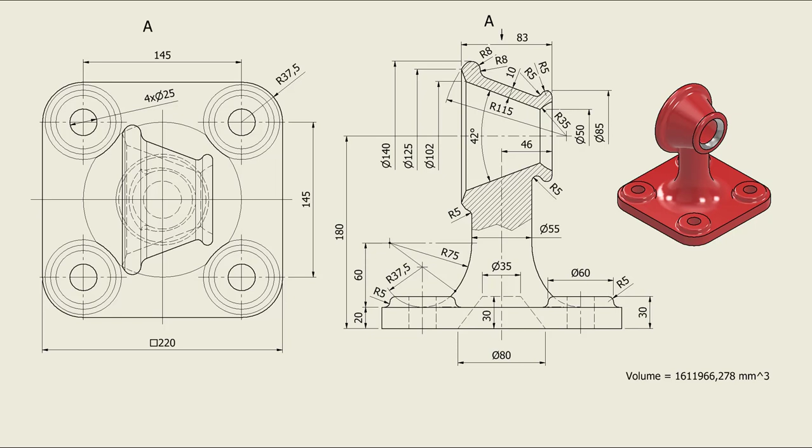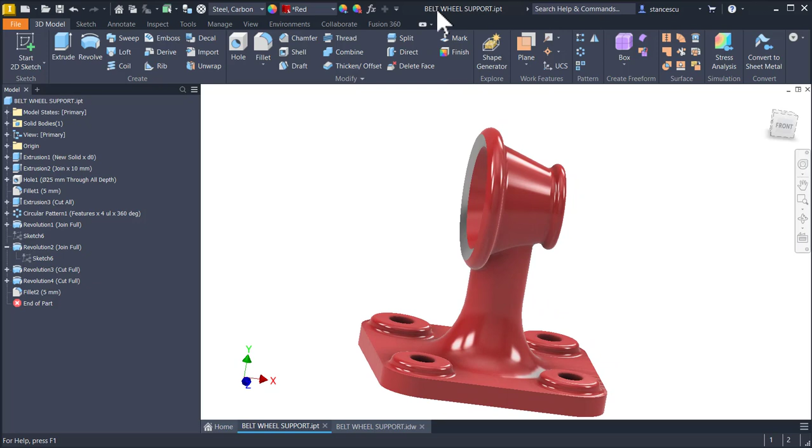Hi my friends, today we model this part with its features, faces, surfaces with the name belt wheel support.

The drawing is here, not very special. I forgot to place a center here because this is symmetrical. As you can see, with dimensions, we'll use them during the modeling.

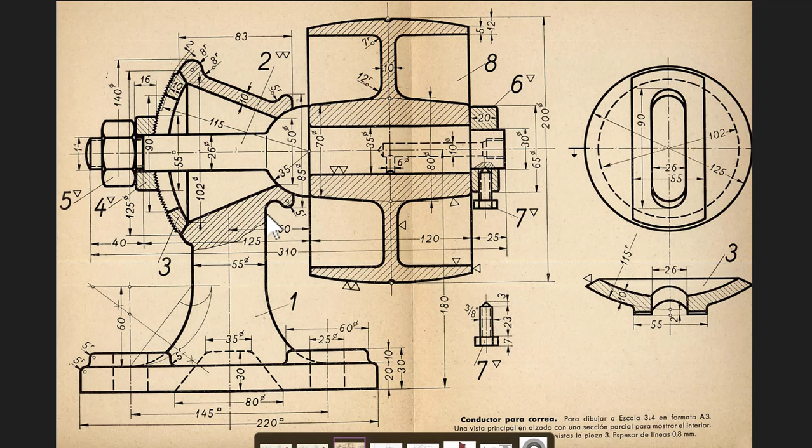The source is this, coming from Timoteo Carrera Soto. I changed some dimensions and we respect as we can this number one model as well. This part is taken from Timoteo Carrera Soto drawings, and you can download it by watching the tutorial number 182, as you can see here.

We start by creating this base plate with dimensions square 220, 145, holes of 25, radius of half of 75, and 20, 30, diameter of 60, radius 5, radius 5.

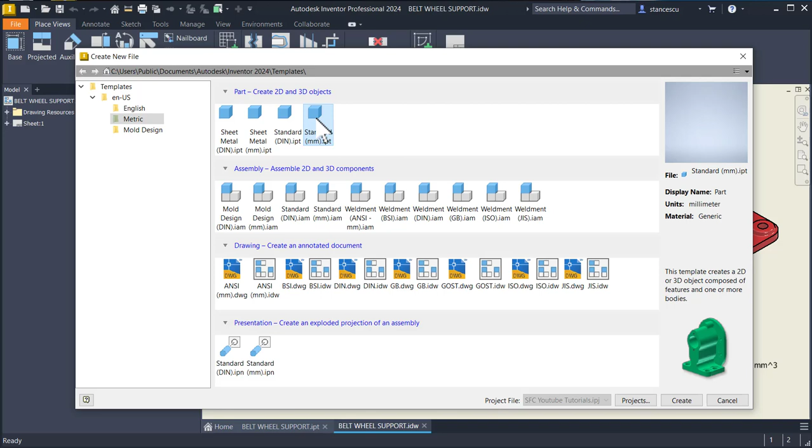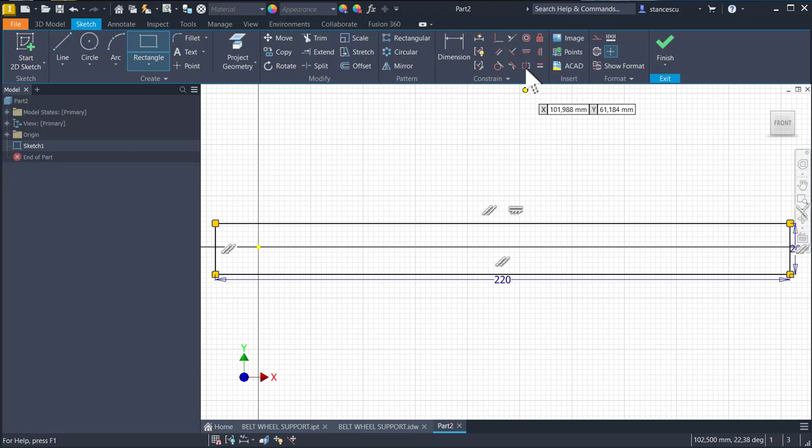New standard millimeters IPT, sketch XY plane, and we draw a rectangle with dimensions 220, tab 20. It must be placed with its center to the center point. Finish sketch.

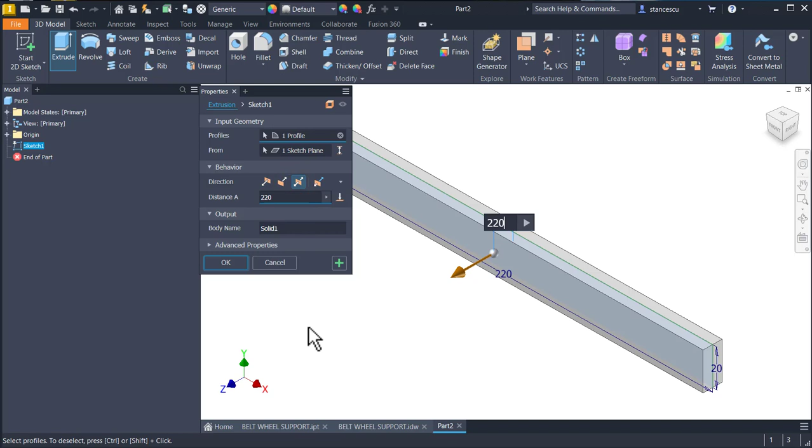Extrude, symmetrical, 220. Okay.

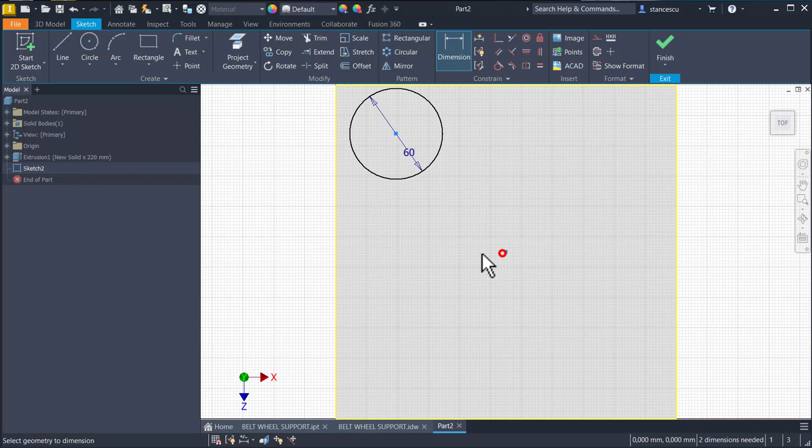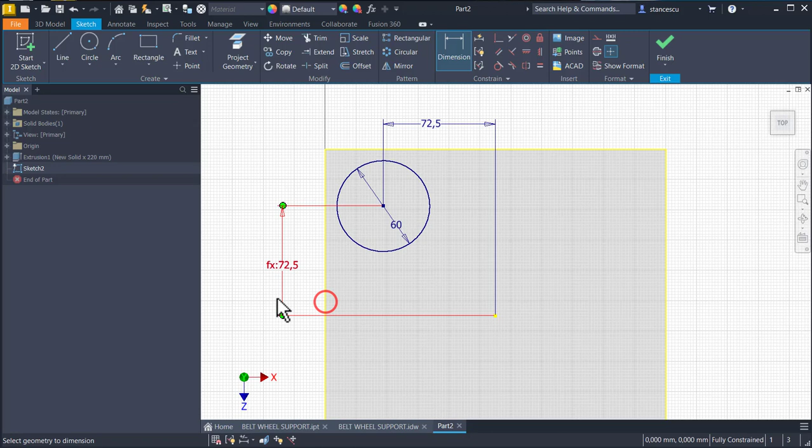New sketch on this face. We draw a circle with a diameter of 60, placed at a distance from the center point of 145 divided by 2, then another dimension with the same value. Finish sketch, extrude.

10 millimeters, fillet of 5 on both edges, hole this face, this center, diameter of 25 through.

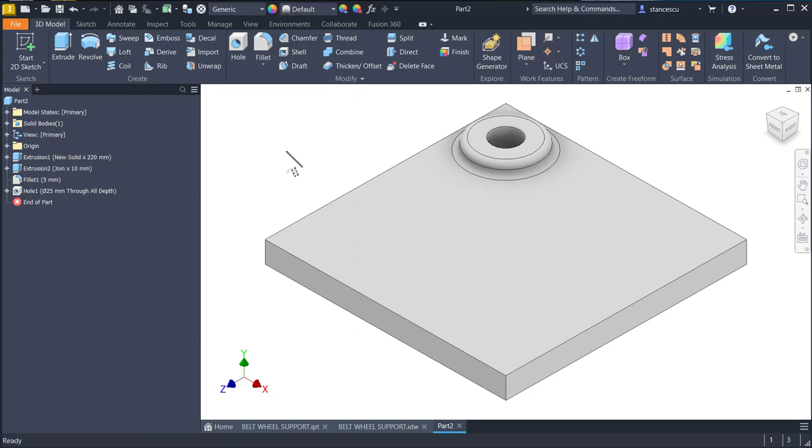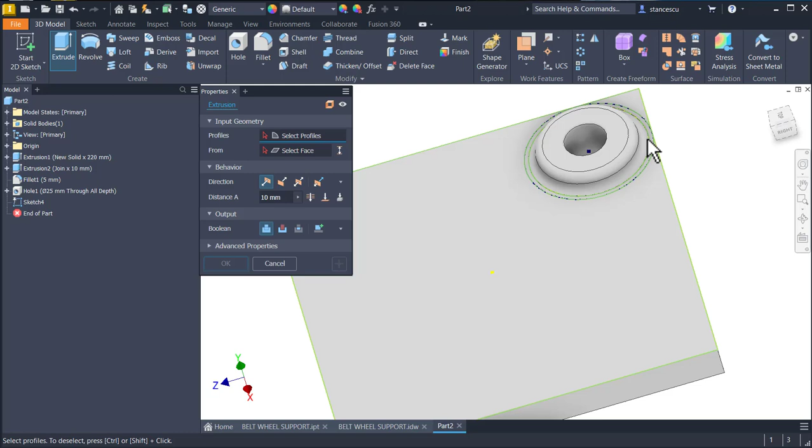Okay. Then on this face, F7, we create a circle with this center and this diameter. Why? Because we want to extrude this corner. The other direction through. Okay.

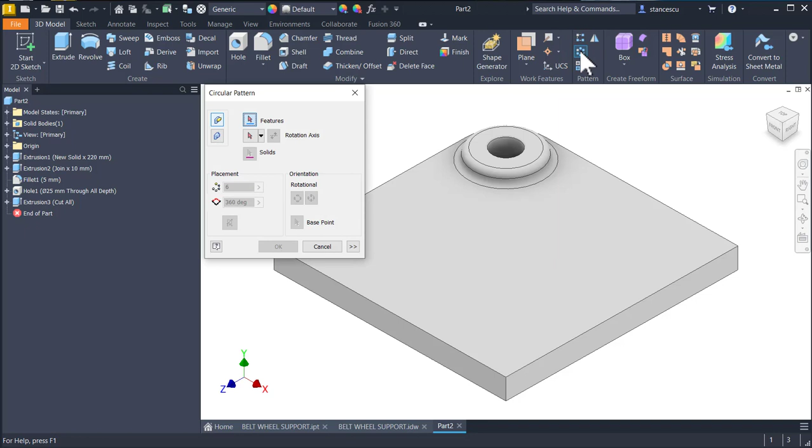Now, since we have some features here, we can apply circular pattern for this, and extrusion about the axis Y. Not 6 but 4 instances, as you can see.

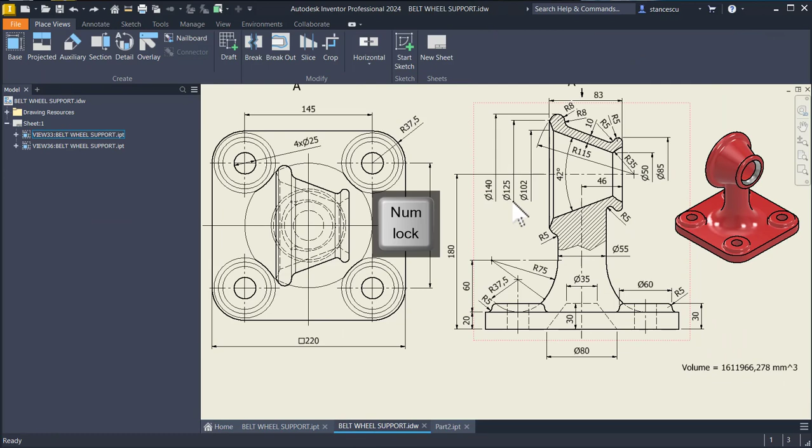This is the base plate. We continue by creating this post with fillets here. Dimensions are, as you can see, diameter of 55, distance of 180, and 2 arcs, 1, 2.

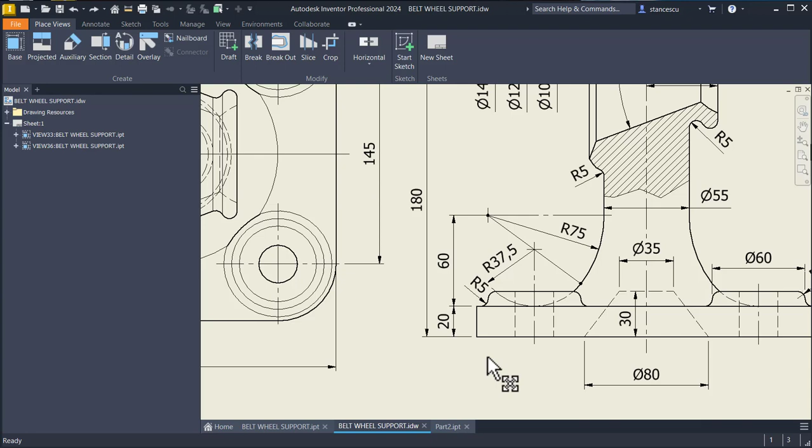You'll see that we don't need these 2 radii. Only this is important, and also this distance of 145, which is the distance between the centers of the 2 holes. This point will be important.

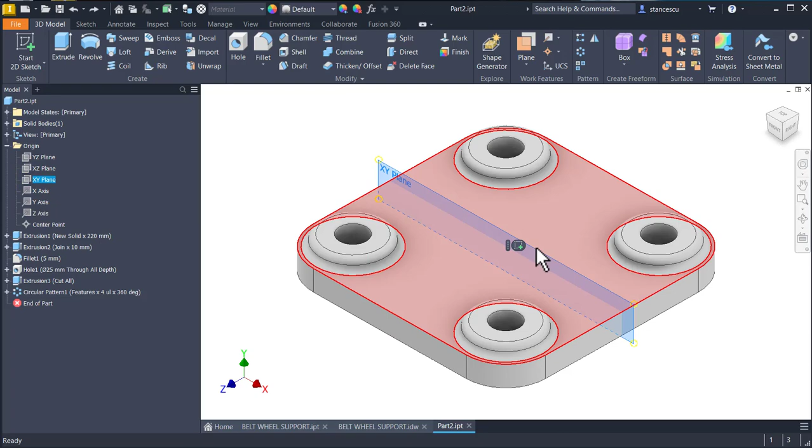We use this plane, F7, we project this line, we verify is it 145, yes it is, but as a driven dimension.

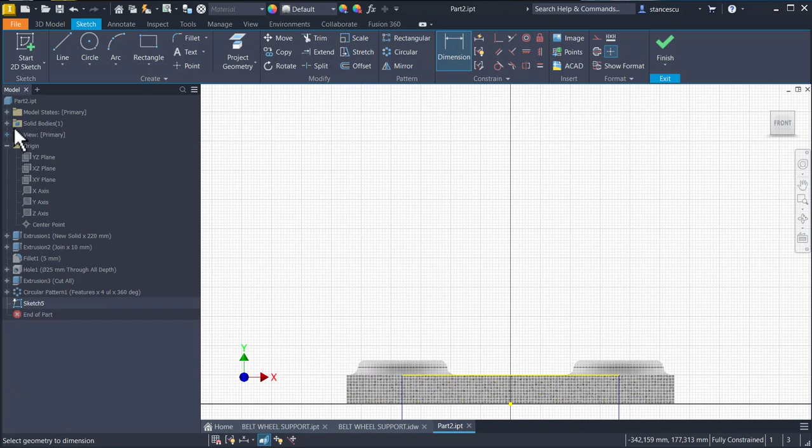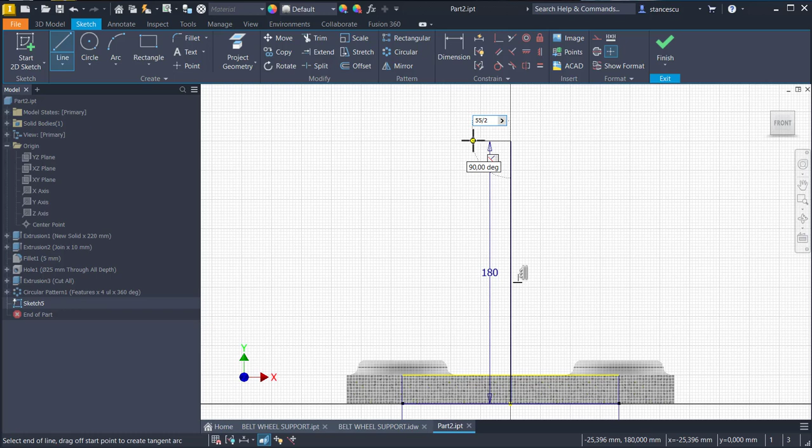Then I create an axis from this point, which is the center point, at 180. Then to the left by 55 divided by 2, and down.

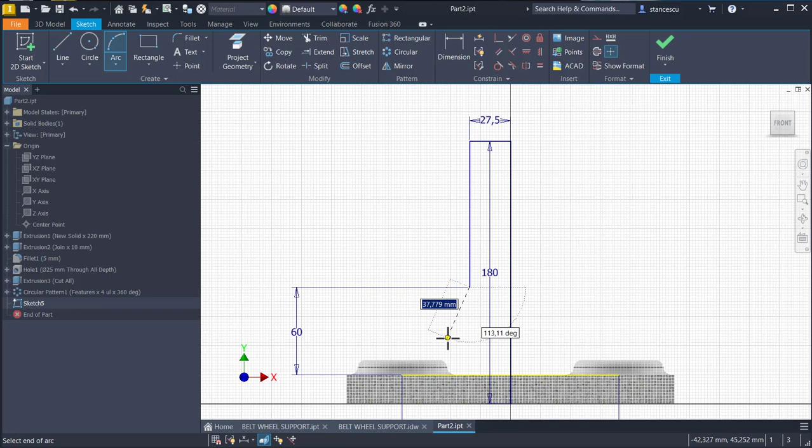Then I apply the dimension of 60 between these two, 60, and I draw an arc to here, and I wait to see this constraint. What means this? This means that this point is on the same line with this, same horizontal with this point.

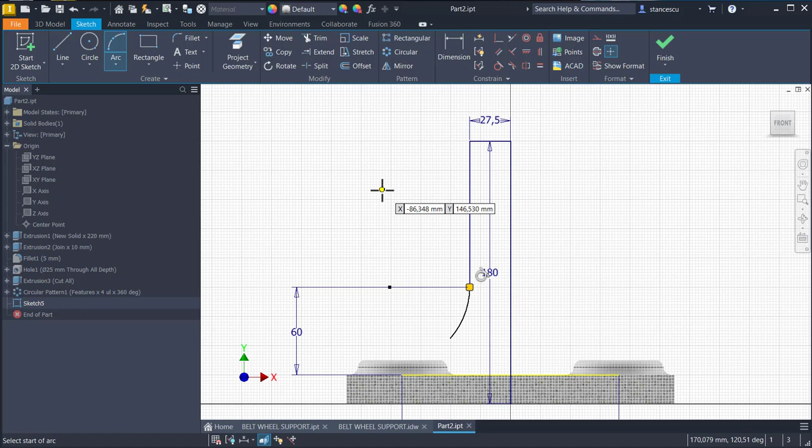You don't see any dimension here. Then I draw a line from this point to this end. I make it construction line.

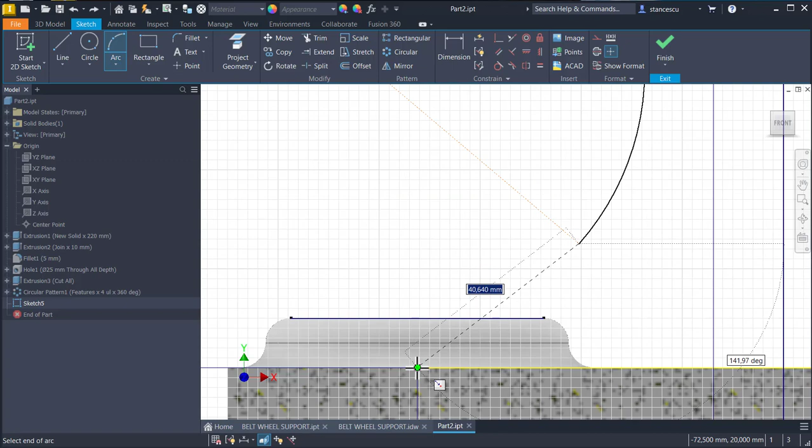Then I draw another arc from this point to this point. I place this center point on this line. I put the same point on the same vertical with this end point, and finally I place this point in the center of this line. Now we have a fully constrained sketch without dimensions for these two arcs.

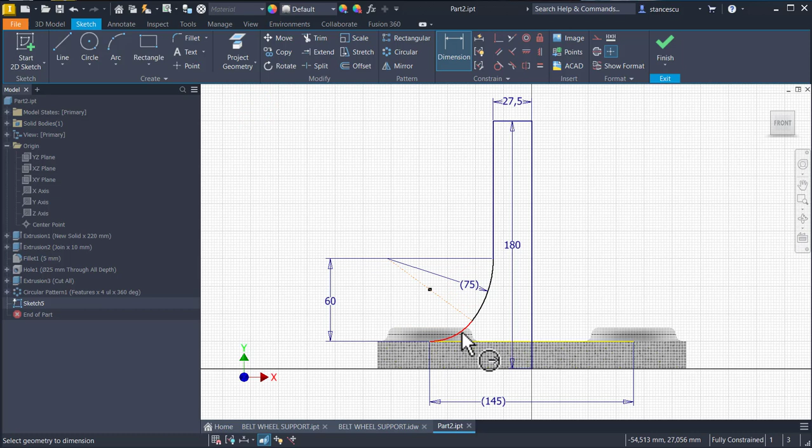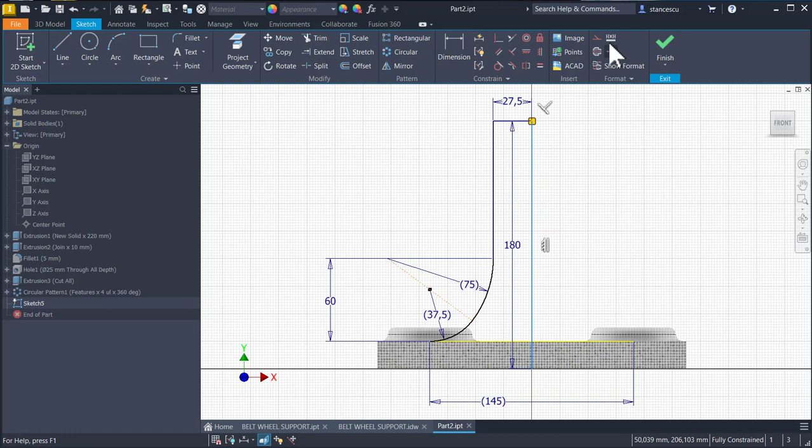Let's verify. This is 75, I accept. This is half of 75, I also accept. These three are driven dimensions, but we use the geometrical construction here to create this combination of arcs. I make this center line and I apply revolve. Okay.

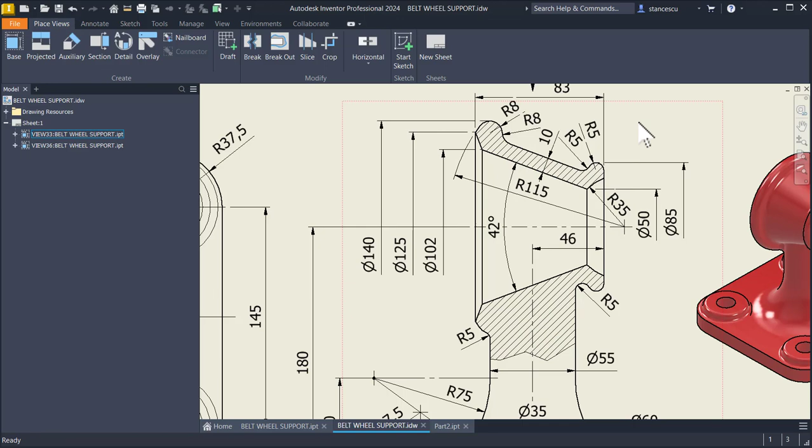Next is this revolving contour. We'll start with the external contour, then with the internal one, but I create both contours at the same time, and I'll use shared sketch.

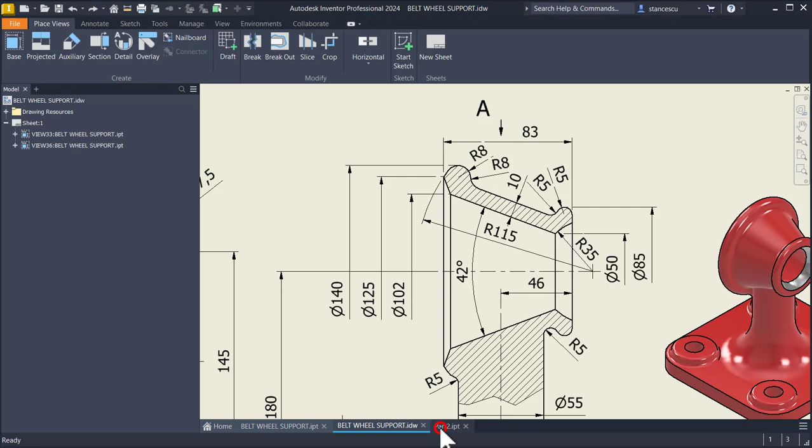There are a lot of dimensions here. I let you take a look at them and watch my sketch. We use the same plane for the new sketch, XY, F7. I project this line. I make it construction line.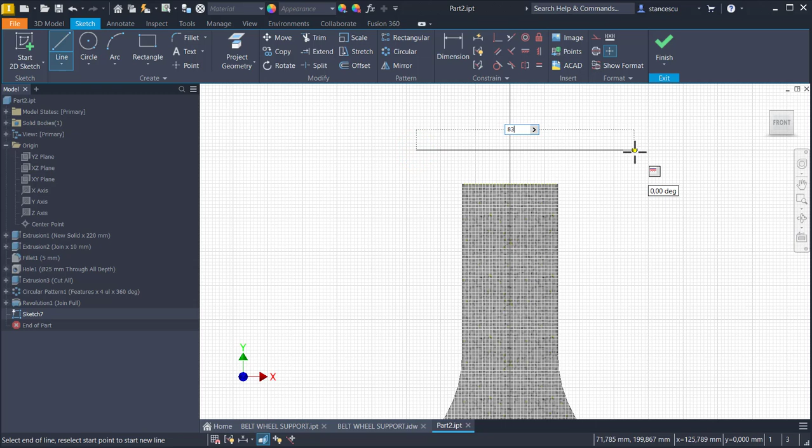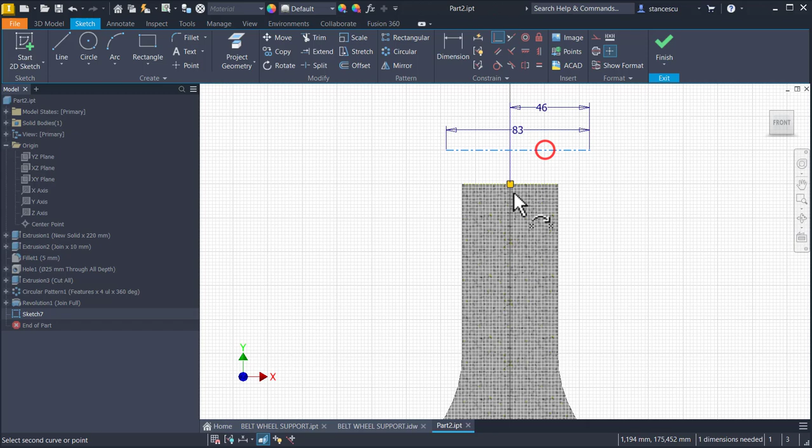Then I draw a line with a length of 83. This is a center line. I place this endpoint at a distance of 46, and I place it collinear with the other.

Good. Let me move these dimensions to have room for other lines in the new sketch.

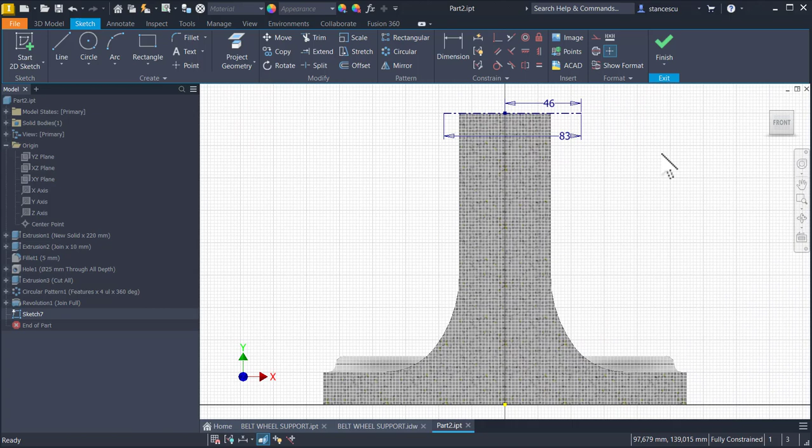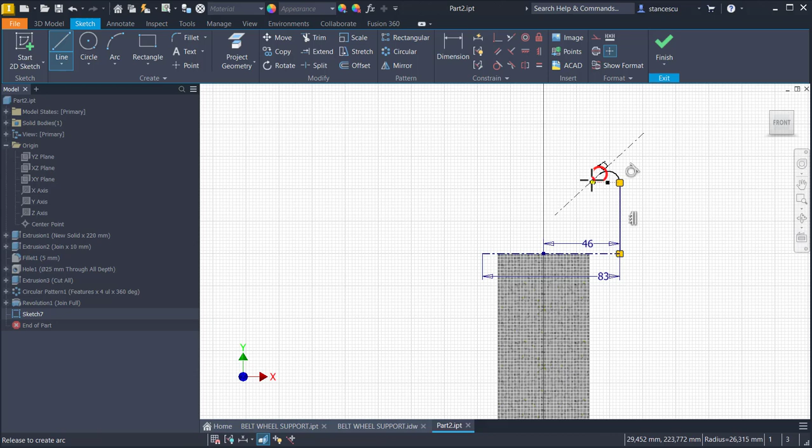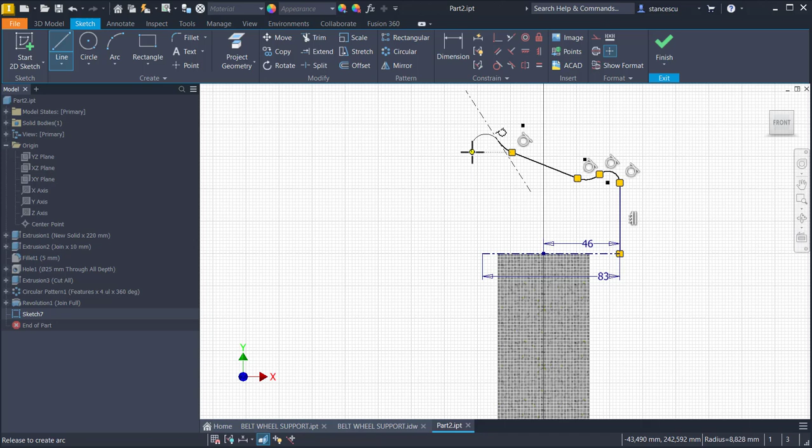Line from this point up somewhere here. I keep pressed the left button to create an arc. I keep pressed again the left button to create another arc. Then I find the tangency. I finish this line. I keep pressed the left button up, keep pressed again, and I go somewhere here.

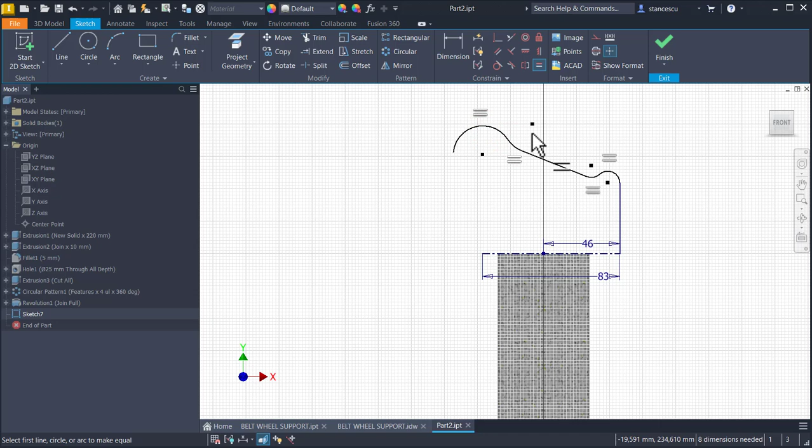Let's place this contour at their dimensions. These two arcs are equal. These two arcs are equal. Dimensions are 5 for both, on the right and 8 on the left.

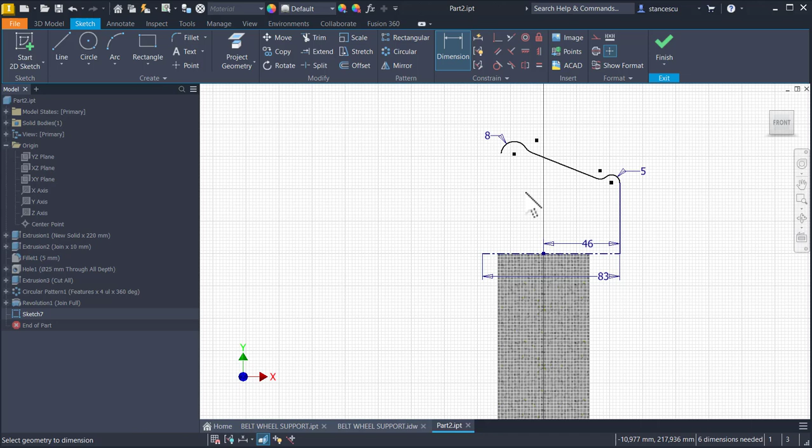We have a dimension from this center line to up of the arc, with the diameter of 85.

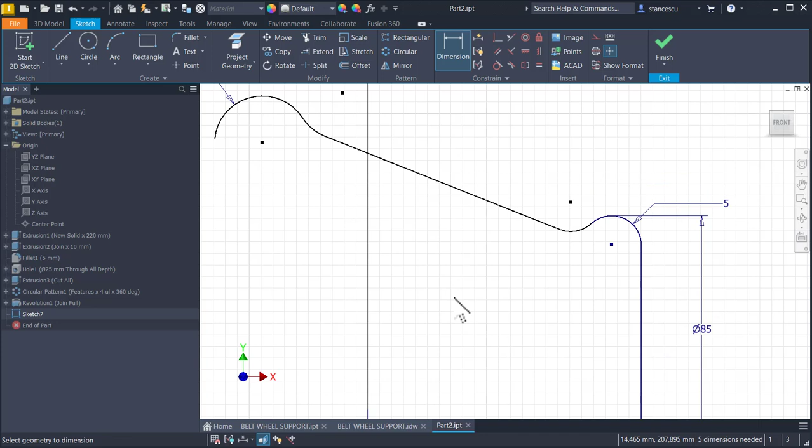This angle is interesting. It is 42 divided by 2.

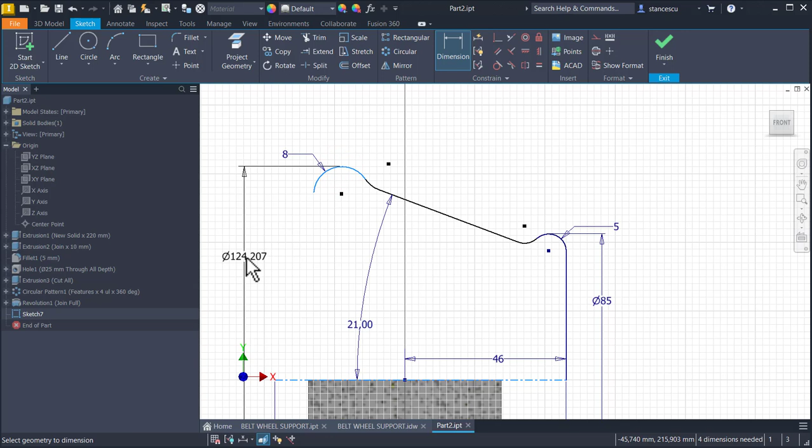The other arc has its dimension, which is 140.

This point is on the same vertical with this point. Let me see if I can move this to the left. Yes, I can.

Same vertical between this endpoint, which is fixed now, and this point. Good. I move this a little up.

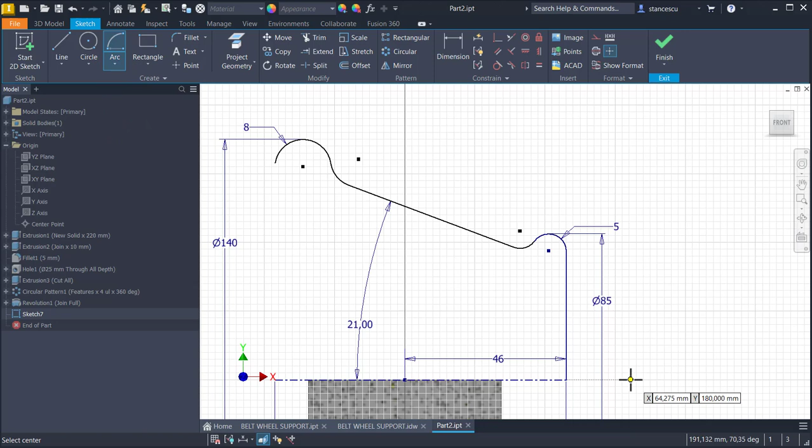This endpoint is still on the same vertical, and I create an arc with a center. Center is here, start is somewhere here, and it goes, as you can see, the radius is 35.

I place this point on this line, then I create another arc with the same center, starting from here and ending somewhere.

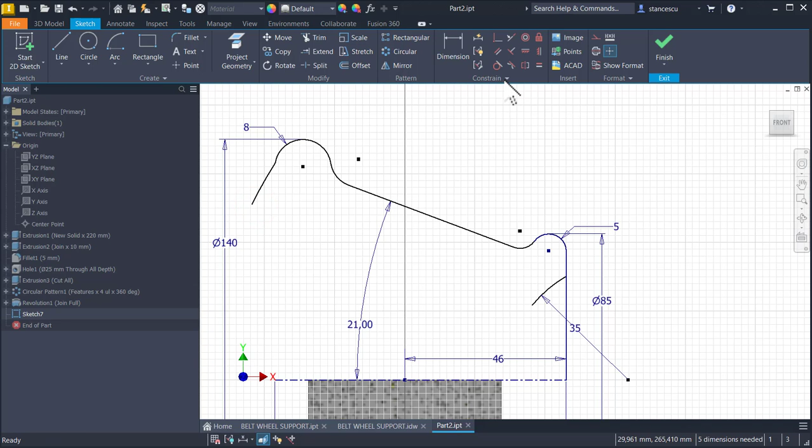This must be 115, the radius. 115.

And I eliminate this constraint because this point must be on the same vertical with this. But firstly, I make this tangent.

Now I move this for a small distance and I apply this vertical. Good.

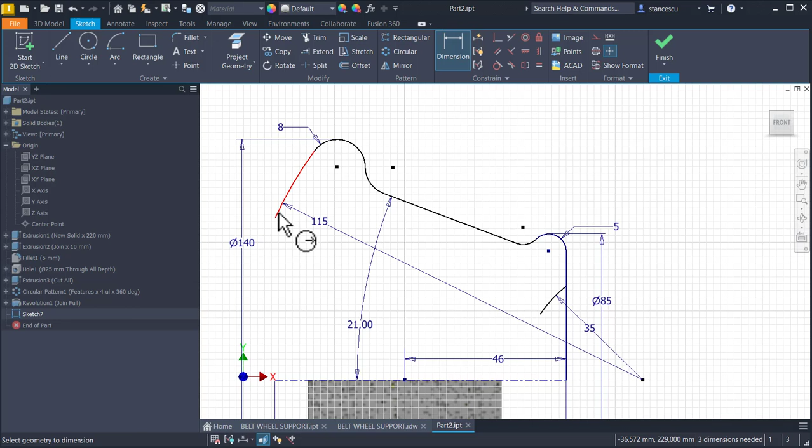The diameter for this point is 125.

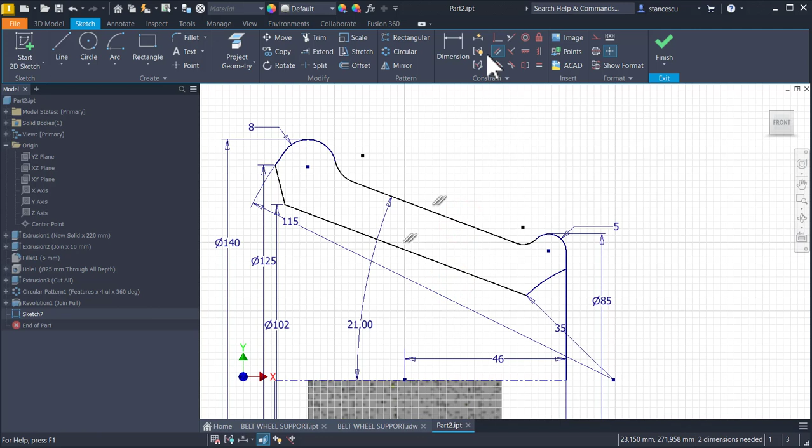Then I draw a small line and I continue with another one. And now I apply this diameter of 102 and parallel for these two lines. The distance here is 10.

Very good. One dimension needed. I'm trying to see what is that dimension. Yes, this diameter is 50. 50. Now we have a fully constrained sketch.

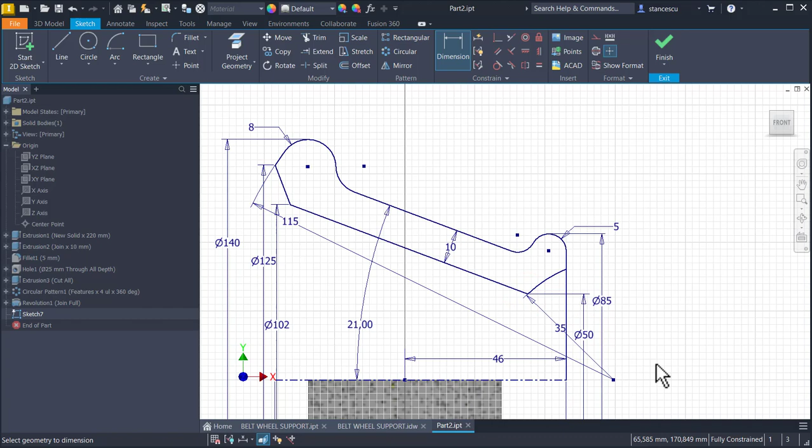Good. I add another line between this point and this end point, and now after I make a little order here, to see better what is here,

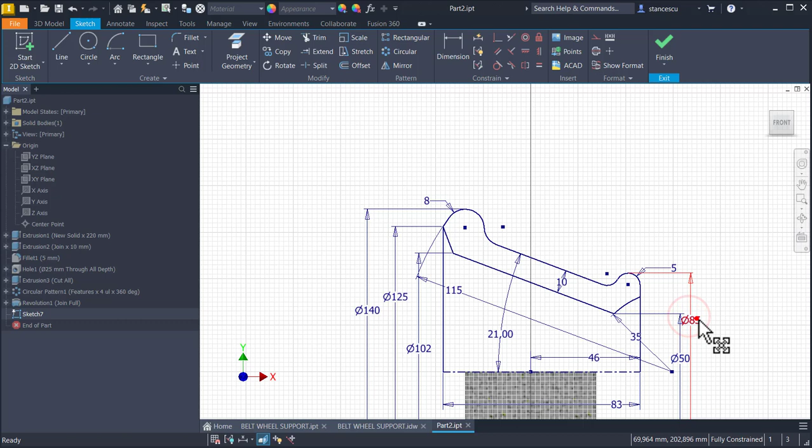I want you to see that we have the external contour, which is this one, and the internal contour, which is this one. I make construction these three entities, and now if I apply revolve, we'll have the external volume.

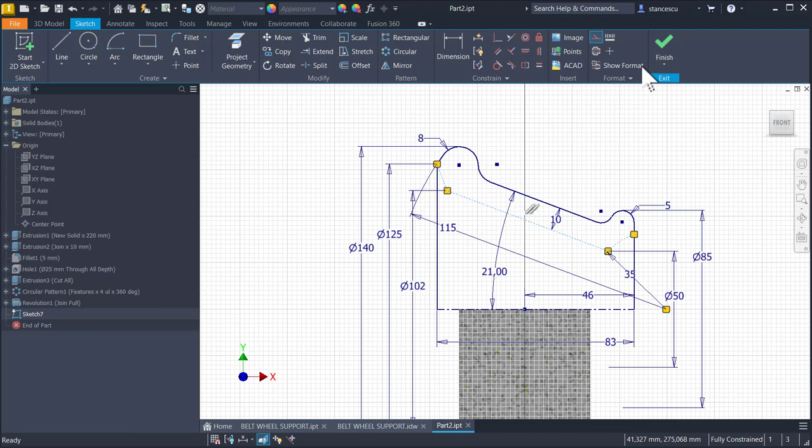Let's create this revolve. Okay, now that sketch used for the external, I make a share sketch. Double click on it, on this one.

Yes, you see these are identical, absolutely identical. If you change something to one of them, you change also to the other.

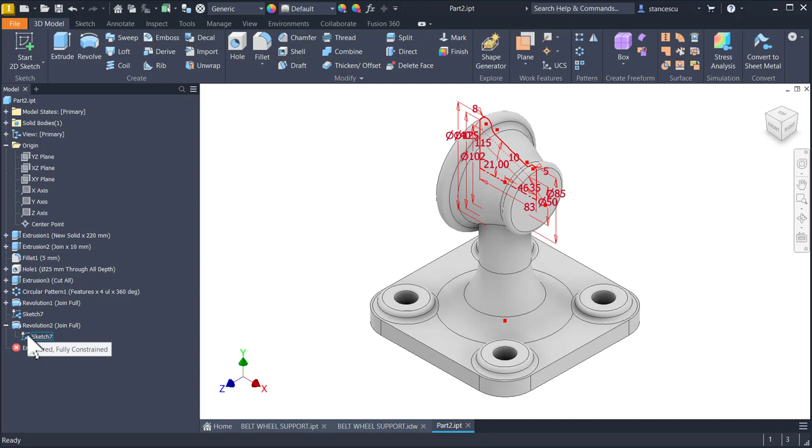Double click here, then I make this normal lines, finish sketch, revolve.

Now I have two selections. One is this and one is this. I select this one to be cutting a volume. The axis is the same.

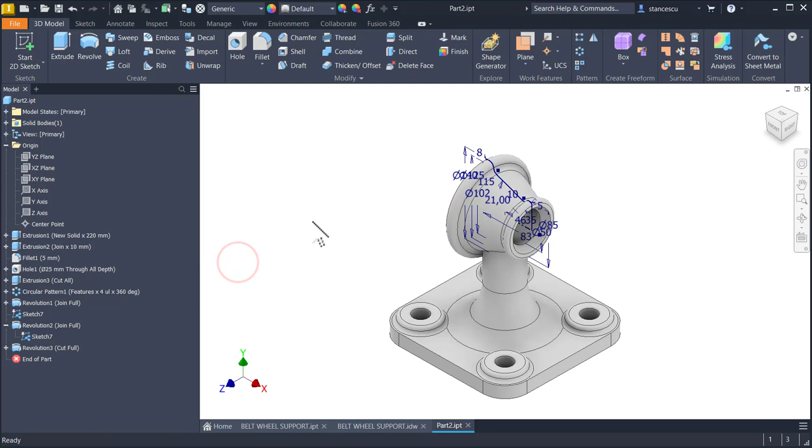Okay. I hide this sketch and it is hidden also this. Did you get this interesting combination of sketches?

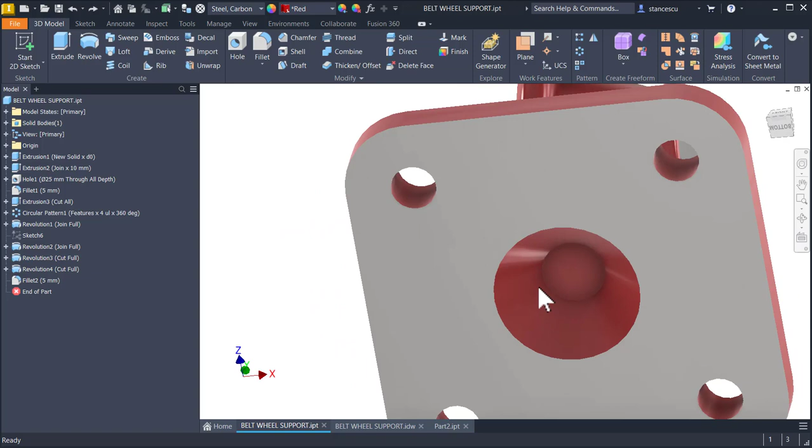Now we take a look here. This is an internal cut. You see this one. Not a big deal. Dimensions are 80, 35 and 30.

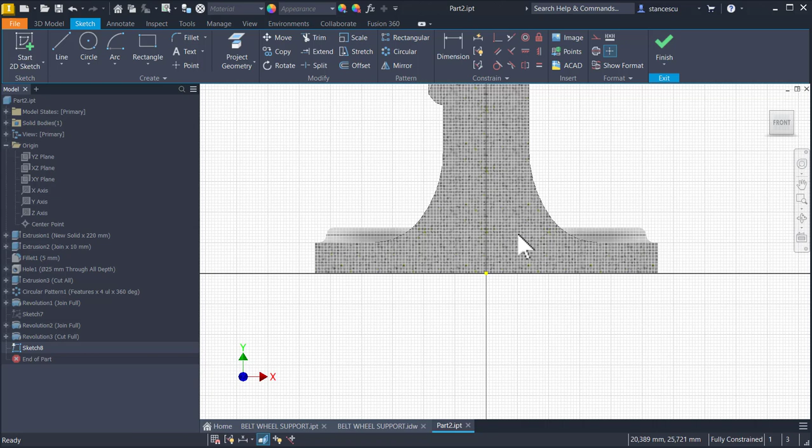We use the same famous plane, F7, and line 30 to the right, sloped and closing line.

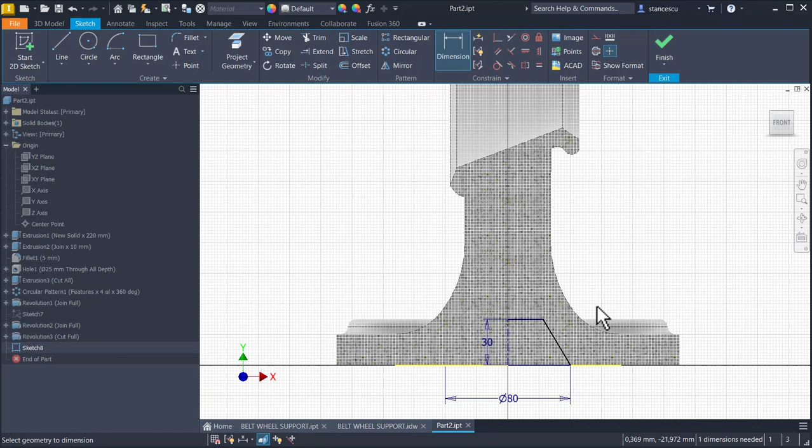I make this center line and I apply the two diameters. This is 1, 80, and this is another one, 35.

Finish sketch. You see was fully constrained. You see this point here where you wait for a while and you see fully constrained. Three ways to find out if it is fully constrained.

Then revolve, cut. Okay.

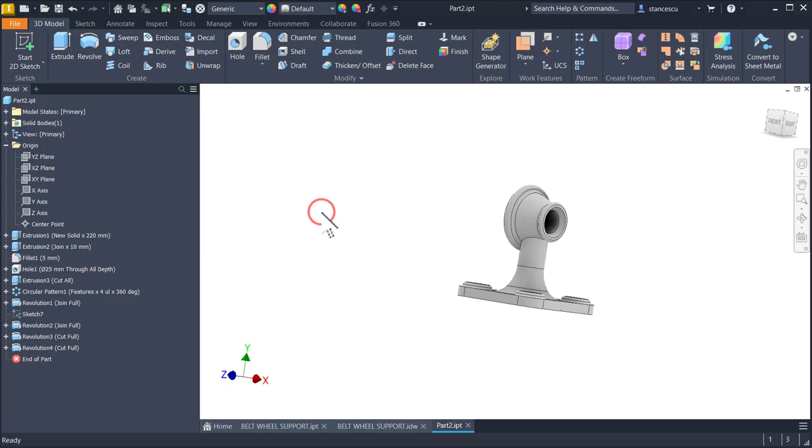The last thing is this radius 5 fillet. I select this 5, and I suppose this is all.

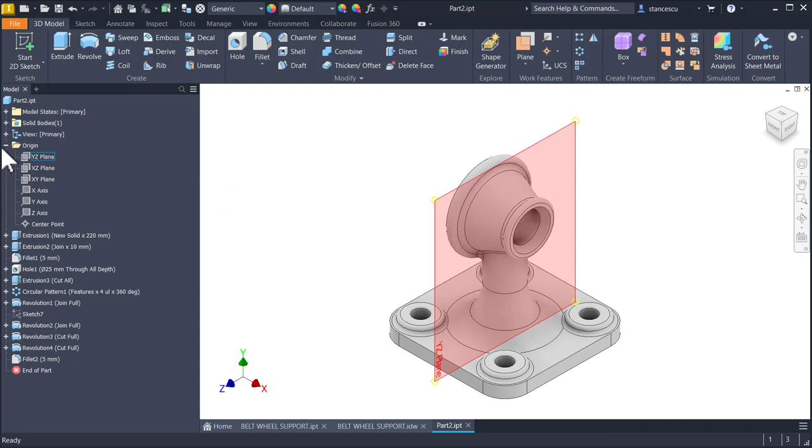Let's see. iProperties, physical, update, copy, close, drawing, double click, and the value. The difference is very non-significant, but to respect our style of work, I keep the last one.

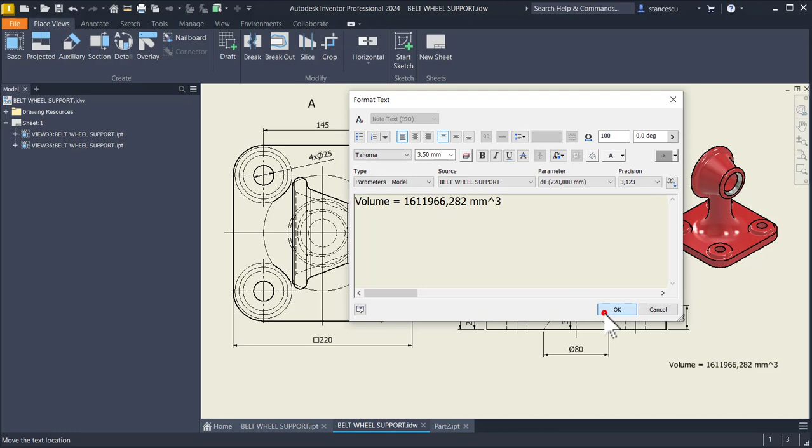Okay, let's apply material, which is steel carbon, then the color, general color, which is red, and some faces to be machined.